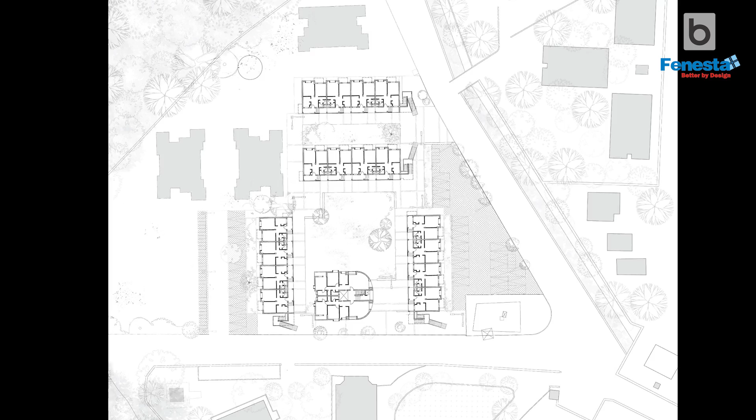The site is located at Vasind, about 60 kilometers north of Mumbai, sitting within an industrial facility of the JSW group, which is their color coating plant. One portion of this is now meant for housing, with about 54 families going to be housed in this complex, sitting within a larger complex.

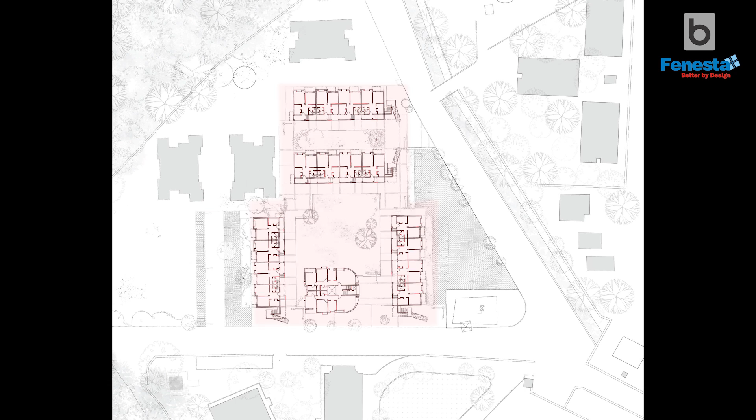As you come into the JSW complex, there's a road which sits there. The older set of buildings are sitting in these areas, the existing blocks, and there are two blocks sitting here also. The site we were supposed to work in was roughly this portion. There's a road here, you come in, and the plant is located somewhere on this side, very close to where the housing is being developed.

In terms of context, a huge marker was one large banyan tree sitting here. There is an RG, a reserved ground portion, so you cannot build on this. So we were left with this area to work on.

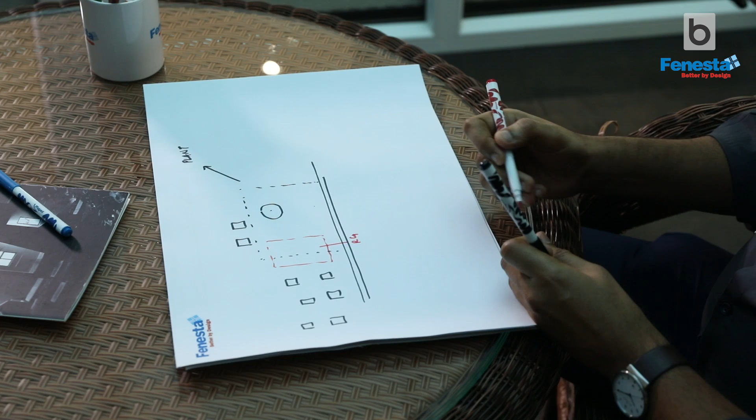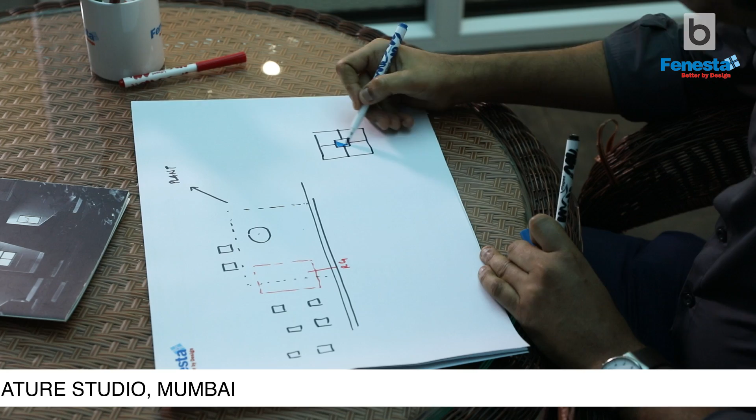The intent of the project was to create housing which is more inclusive and interactive, where people could relate to each other more easily. The common paradigm of how housing is organized programmatically is generally a central core with 4 apartments sitting around it.

What we've made is a very simple thing where we've opened it up and organized these 4 units this way, made a corridor here, and added a staircase block here. So the same blocks you see here have now got organized here and here.

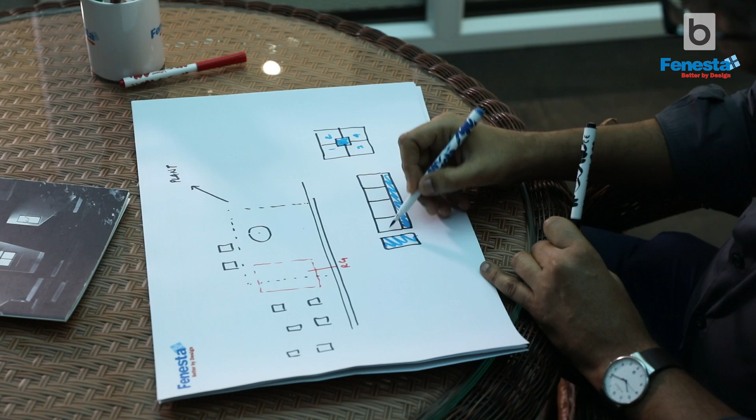What this immediately does is open up the possibility of each person looking out, with their house connected through this corridor, as well as the staircase becoming like a public space open to everybody around. It's a very simple thing in terms of organizing, but it makes a huge impact on how the building opens out to the people.

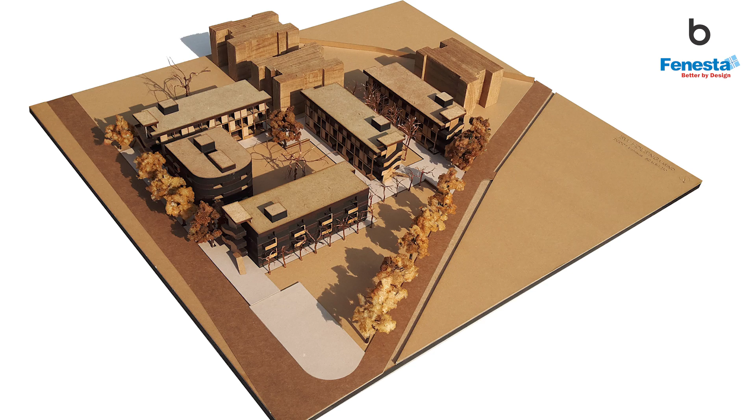Taking the same thing at a site level, because the courtyard was there, we've organized 4 blocks so that with their corridors located here, these corridors again open back out into the courtyard. This becomes the second grade of public space being formed. It's all a green courtyard, and the apartment blocks are all looking into this space, so each person can see each other across it, creating a very interactive atmosphere.

We also had to add 6 houses which were 2-bedroom apartments, while the others were all 1-bedroom apartments. So we had 6 apartments for that, and a challenge of organizing it.

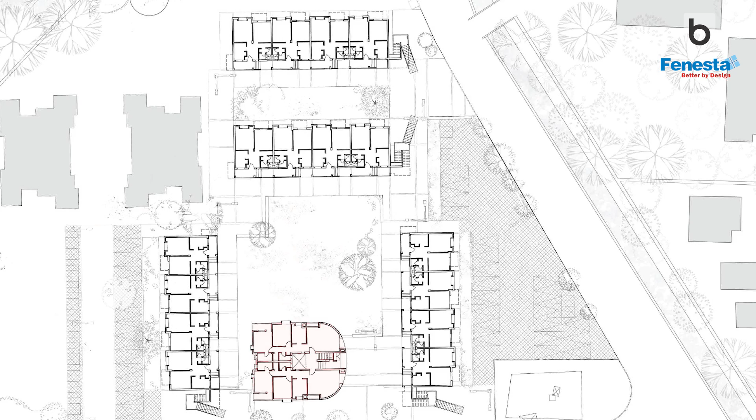What we did was take one block and make it a curved block, and this block became almost like a marker for the whole thing, a pivot which tied all of it together. That's where the road I talked about earlier was, and there's a road here which is also sitting here.

Further to this were the staircases. We located the staircases in a way where they all sat here, so there was a staircase at the end of each block, and we did a simple twist to the staircase which gave it a completely different character.

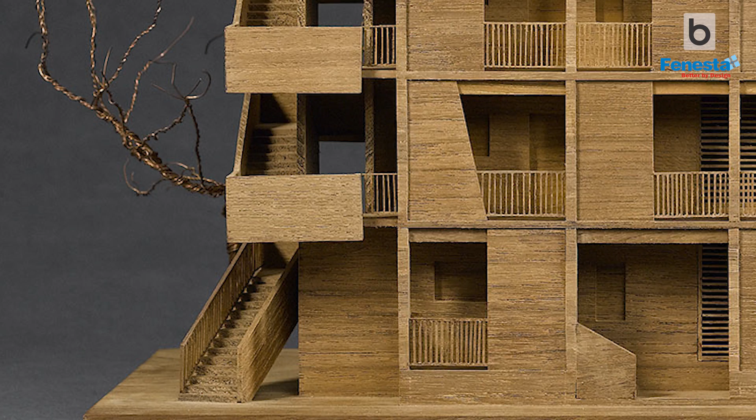One is that the staircase is open, so when you're walking up, people can see each other. It's not an introverted staircase. We also did a little twist where we turned around the last flight of the staircase, creating different scenarios where people going up are almost interacting with each other. It also creates a different experience of walking up, so it's not your regular staircase.

So the relationship of the staircase to the road is also very different, because this is the main movement happening, and these are almost like inviting you up into the buildings and then getting you inside.

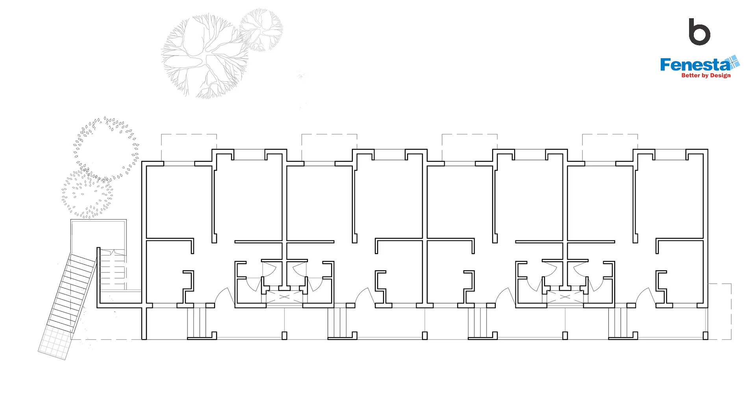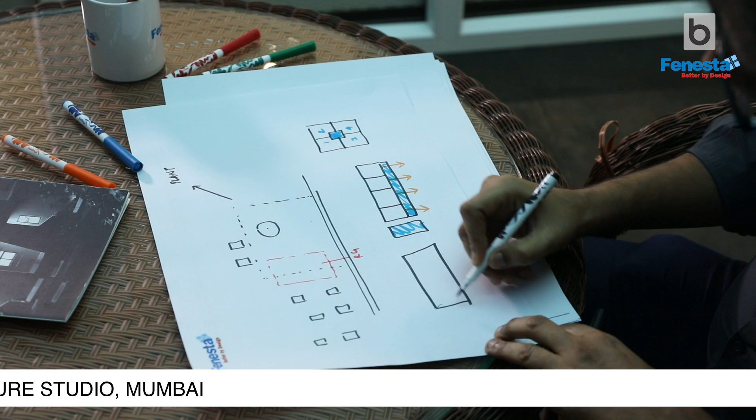One more thing we did - going back to this sketch, if you see this block, this is the upper level where there's a courtyard. At the lower level, we made each house have like an otla space, with steps taking you up to it. So the lower houses are almost like individual units, accessible right from the movement area itself. You no longer have to climb on top or walk past others - each person has an individual house.

This creates different qualities of interaction between the house and the outside. Whereas at the upper level it's a long corridor, which becomes a good space for children to play in, where mothers who don't want them going down can keep them there. Here at the lower level, you can sit out on the porch and have your morning cup of tea, or read a newspaper, and if your neighbor is walking by, you can wave out to them.

Coming to the apartments, we did a pre-design study and went through a lot of the existing houses. We realized there were very high densities - sometimes a couple with 2 or 3 children, and at times parents or even two grandparents. Now all of these people had to be fit into that one BHK.

So what we did was create a small multi-purpose space before you enter the house, before the living room. The kitchen sat here, and the toilet facilities sat on this edge. This multi-purpose space sat here, with the corridor sitting outside.

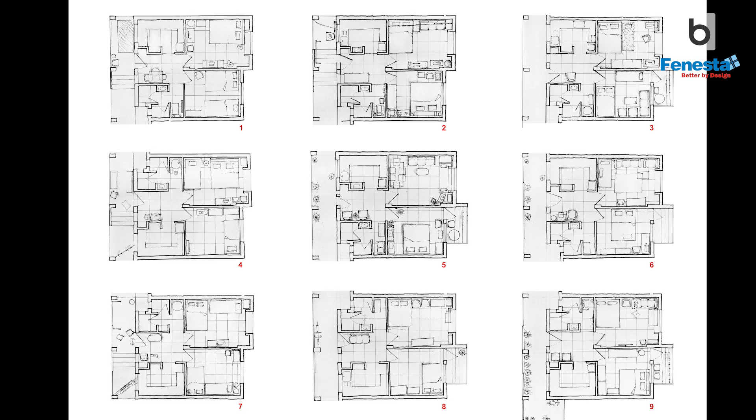It almost becomes like grades of publicness - the corridor has a certain public feeling, this becomes the next public space before you reach the most private spaces in your house, like the bedroom or sleeping area. Those become very private, and this becomes like a transitionary space.

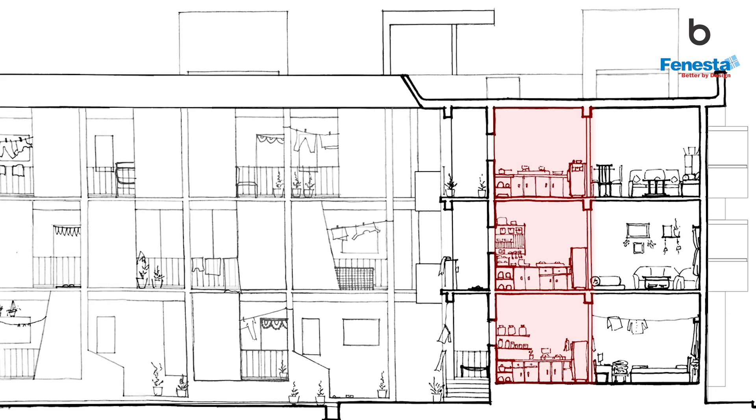Another thing was that we kept the kitchen on this side, onto the corridor side, very intentionally, because we wanted whoever was cooking - largely mothers - to have a possibility of being connected to the corridor and out to the courtyard.

What that does is it doesn't trap them inside a space the whole day, not having a possibility to look out. This keeps it a little active for them, when people are walking up and down the corridor, they have some interaction. It also means they can watch out and monitor the children. If a small child is playing here, there's a safety thing which works out automatically, so she can do her work there, but she can also look out.

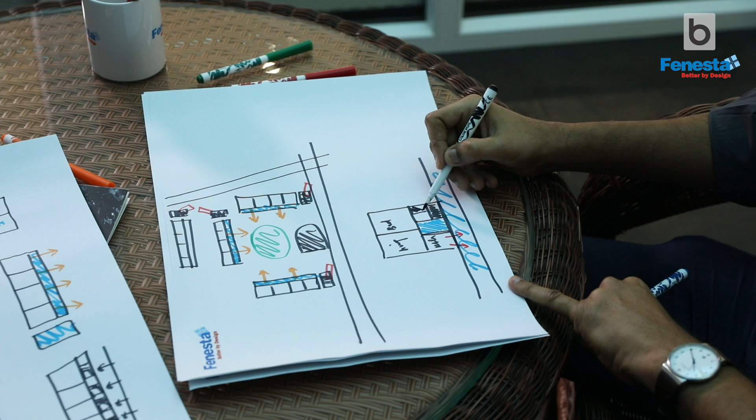Another thing which we've done in the house, which is a very small gesture but works really powerfully, is separating the bath area and the WC area. In a high density house, you want the possibility of accessing these two spaces separately.

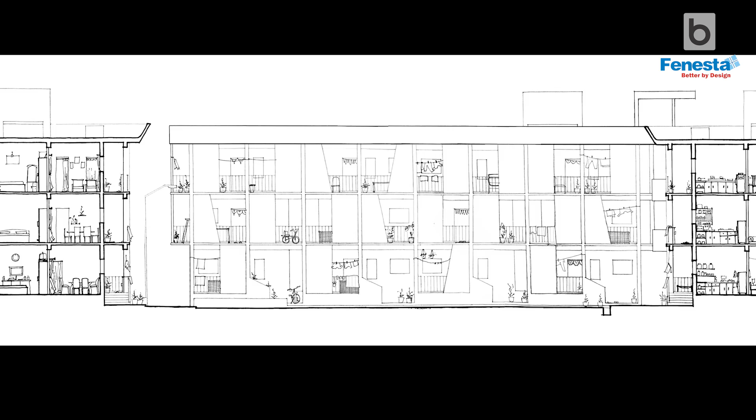Inspiration for a lot of the things here comes from traditional ways of living which have been there in our society, in many societies, but we seem to have lost along the way. The simple idea of the corridor being organized this way is not new—it's what chawls used to do. Even the social housing done in Netherlands and Holland has that same typology. This typology is followed pretty commonly in many places of the world. For some reason in India we've given this up very easily, and it has its own strengths which we should not lose out on. We've tried to draw from simple examples already there in the past, but use them in a contemporary way to create a new living environment.

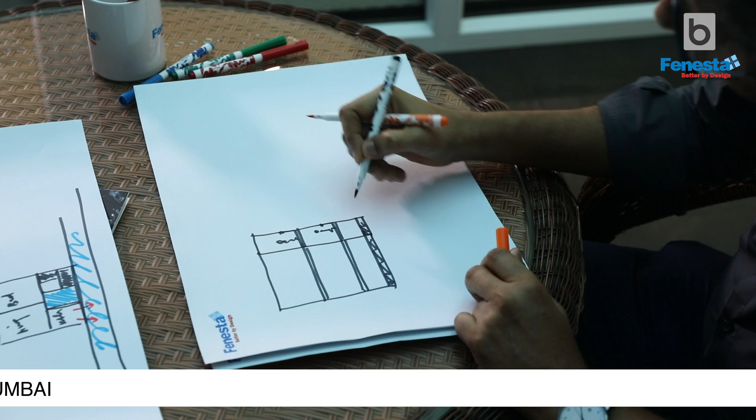If you look at the section, these are the corridors I've talked about earlier. That's like a plinth which you enter at, and that otla sits there. So what you get is, if you have somebody standing up there, somebody standing up there, and somebody here, with the ground moving this way, it establishes all these connections—the connection with the outside, but also connections with people at the ground level.

You can actually see people using this—when they get up in the morning, they're talking to each other. At times there are situations where women are sitting in the block across there, and they're able to have a conversation with somebody on the other side also.

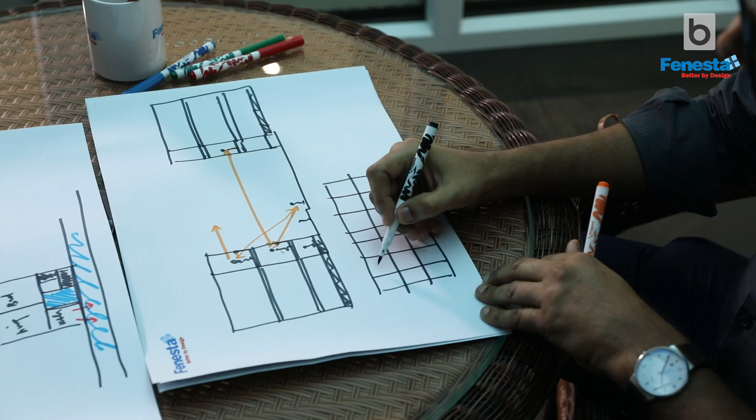In terms of elevation, the building is very interesting because what we did was work on a simple frame structure with a series of columns, with the three levels sitting here. What we've done is create screens which help create a very interesting light and shadow experience when you're in the corridor, but also create different degrees of connectivity between the corridor and the open space and the courtyard outside. That's how we've articulated the building.

The staircase block sits here, and that has its own thing. So what I was talking about—you pull a flight out that way, and then you get a completely different experience, because you draw people in. The whole experience becomes much more dynamic in the way you move up and then move along the corridor. That's how we've articulated the elevation.

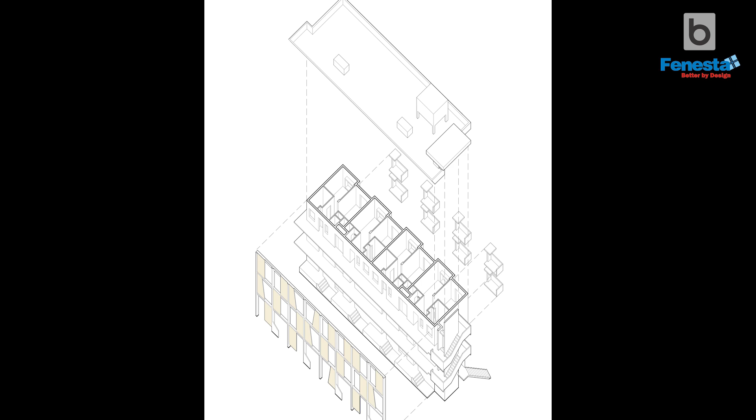The construction technique and materiality are very simple—it's a frame structure with infill or brickwork, plaster. It's all about how you articulate the joinery of plaster, beam, column, and the articulation sizes. A lot of our work is based on proportions and subtlety, and the balance and restfulness of that. It's not too loud, not over the top, but there's a gentleness and balance to the whole thing. It's very important to achieve the right balance, because what's important is that people who come there have a sense of calm and enjoyment, rather than the architecture being over the top. That's the basic thing we worked with.